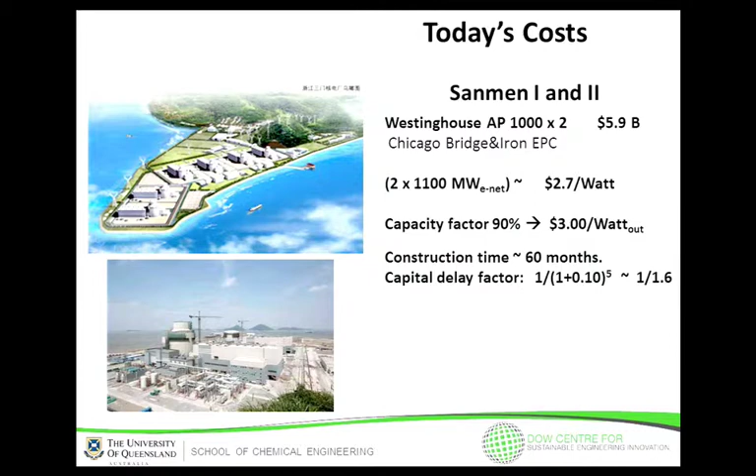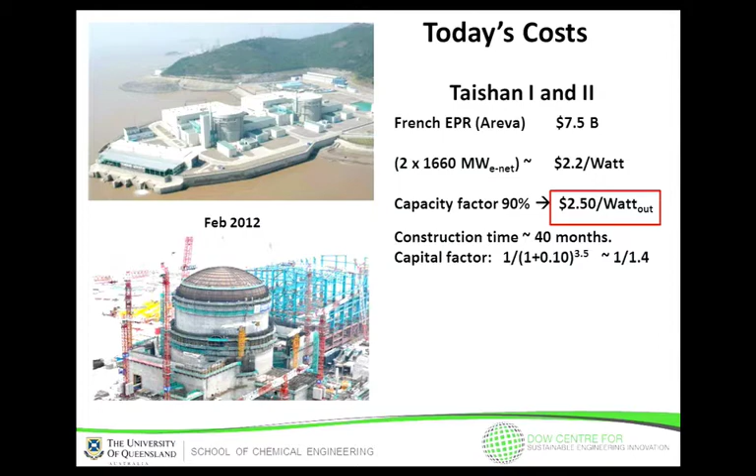Sanmen in China, built by Chicago Bridge and Iron, came in at about $5.9 billion, including financing costs. That's about $3 a watt output in cost. It took about 60 months to build. So that's not so bad. Taishan isn't finished yet. It's probably going to come in maybe a little bit cheaper with the Areva EPR design. Areva didn't make any money on this job, but nonetheless, it still looks not so bad. Probably is going to take about 40 months to complete, but probably coming in at a pretty reasonable cost.

In the US, however, Vogtle 3 and 4 is already looking like it's going to be close to $8 a watt. And that's early. It's not done. And so it's only going to go up from there. It's not going to come down.

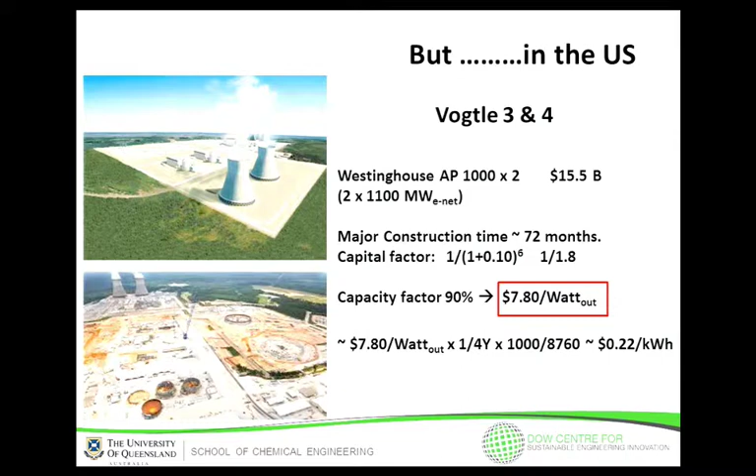So these kinds of costs are really pretty prohibitive in terms of producing power. And essentially all projects, including the ones in China, always escalate. I mean, you never see a case where they're being built under budget. And so all of these costs are quite high. And when you're looking at a financial risk of putting billions of dollars at stake, and you have these kinds of risk factors, people end up not making decisions.

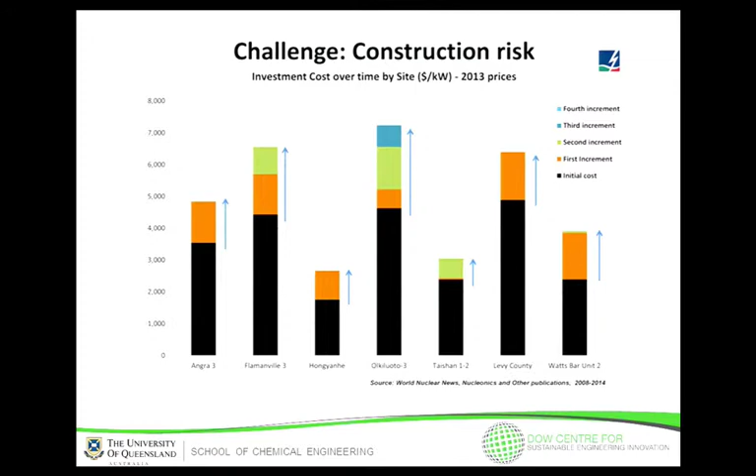And I think that's going to be true here in the UK, where they claim they're going to be doing some new build, but when the people have to write checks with these kinds of risks, unless they're backstopped by the government, they're not going to be making these kinds of decisions. Not that people don't spend billions of dollars. People spend billions of dollars all the time on big projects, but they don't want to not make any money when they do that.

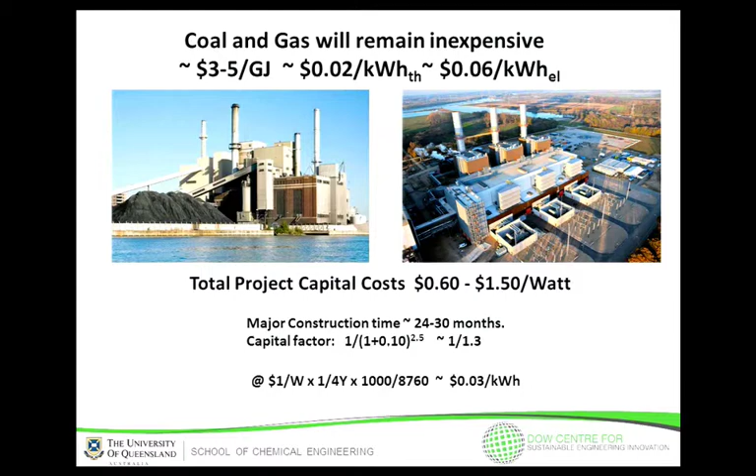The setting, though, in terms of the competition, is that coal and gas are going to remain inexpensive. They're going to remain inexpensive for our lifetimes and probably our kids' lifetimes. And if you look at just the OPEX cost for fuel, it's going to be around 6 cents a kilowatt hour globally. Some places higher, some places lower. And almost everywhere with the most advanced technology with fossil fuels, they're coming in at about $1 a watt. So that's not a lot of money to be spending for producing power, and because power has to be cheap, that's what it needs to cost.

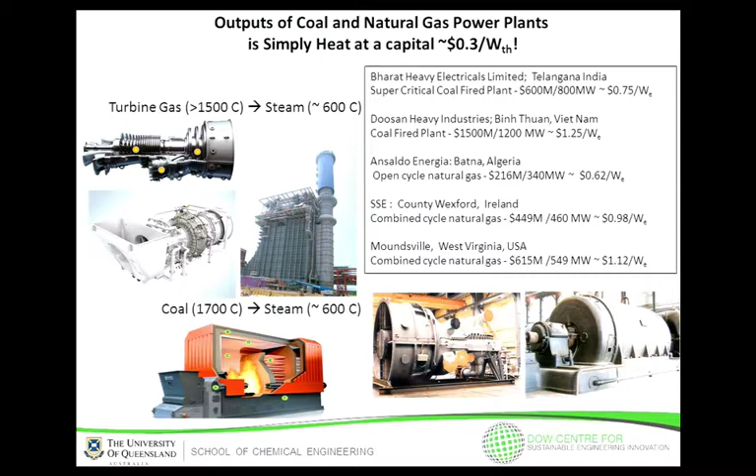And the cost of $1 a watt is using advanced stuff. You're using supercritical steam, combined cycle, all the state-of-the-art types of power technologies, and it's still coming in at very, very low capital costs. On dollars per watt of thermal, it's only about 30 cents a watt thermal production.

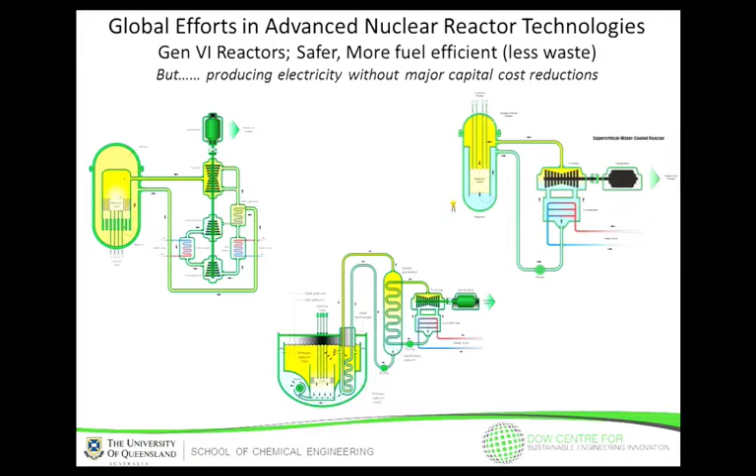If you look at what people are doing in the nuclear space, if you look at all the Gen 4 designs, they're all terrific in terms of addressing concerns on safety, better use of fuel, all kinds of new bells and whistles that make them nice engineering designs, but unfortunately none of them are going to be cheaper than the old designs. They're all going to be, in fact, more expensive.

There's been talk about co-producing things like desalinated water, and there was a project in Kazakhstan to take a 1,000 megawatt reactor and derate it a little bit and do desal. With power at 1,000 megawatts, 333 megawatts electric, that's about $83 million a year in revenue. Or in the case of this plant where they derated it, they made 120,000 meters cubed per day of desalinated water, but water is produced everywhere in the world for $1 a meter cubed. So desal only, in fact, reduces your total revenue.

So you might as well just sell the power. Desalinated water isn't valuable, and we know how to make it. It's off-the-shelf equipment at $1 a meter cubed, and so you don't really gain anything by making desalinated water.

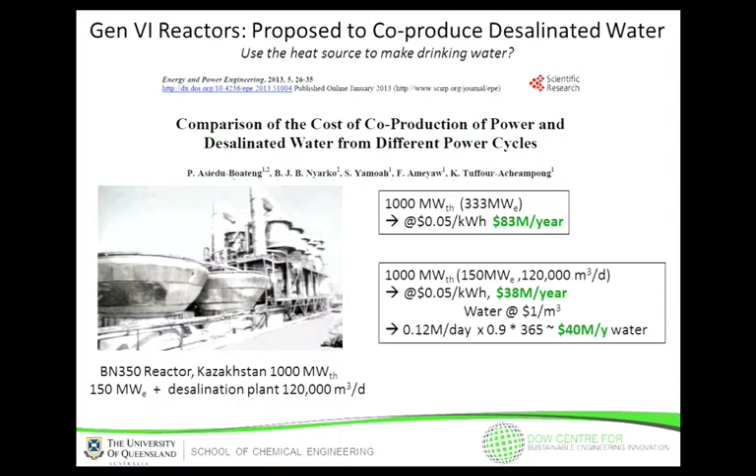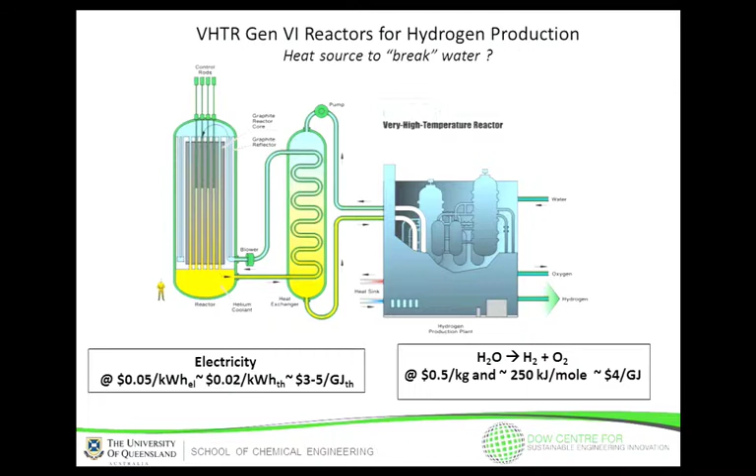There's been a big thrust to make hydrogen. Well, hydrogen is equally as low cost as electricity, so if you derate a reactor or even use some of just the thermal waste heat, you're making something that isn't worth very much, about the same as the electricity. So hydrogen isn't necessarily a good product to be making with nuclear reactors. It's not going to change the attractiveness of the investment in terms of the investment community.

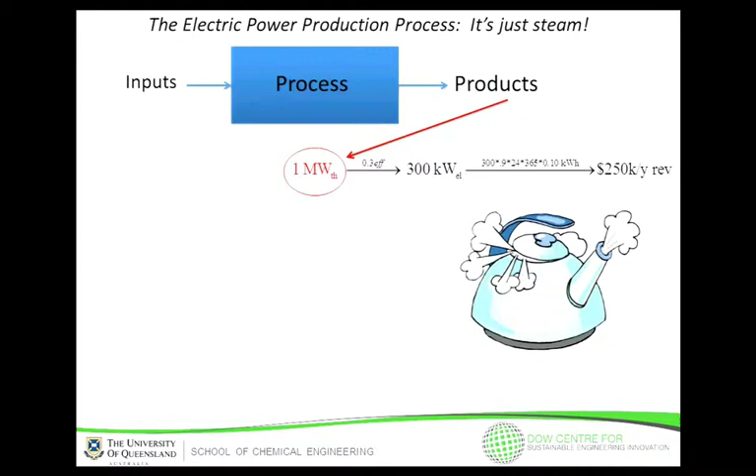At the end of the day, you're making steam. And so if you have a megawatt of thermal energy, 30% efficiency to make the electricity, the most you're going to make in revenue, assuming you can get 10 cents a kilowatt hour, which is generous, is $250,000 a year per megawatt, and it's probably going to be about half that because no one's going to pay you 10 cents a kilowatt hour for electricity. So you don't have a lot of revenue that you're going to be making when you make steam.

And whether you make it from burning lots of coal or natural gas, or if you make it from uranium, you're still making the same product. So the piece of capital that you're making to make that revenue can't cost more than about $1 a watt. That's just the basic economics, and you can't change that. So if one's looking at making an investment to produce power, even if you look at carbon taxes of $30 or $40 a ton, it's still not going to work economically very well.

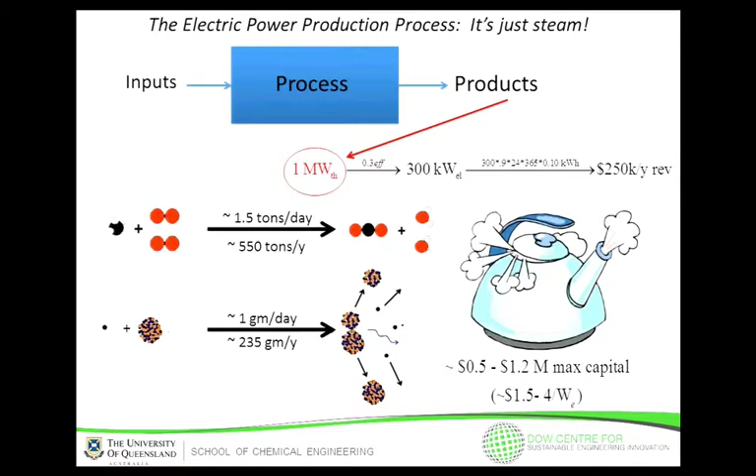So you can look at what happened in biofuels in the US as kind of a case study and learn something from what they did. Everyone was going to take biomass and make it into fuels, and the argument was it's a big giant market. We can make this, and it's going to be green, and people are going to pay a premium. It's a relatively complex process, though, to take things that don't look at all like fuels and make them into fuels. There's lots of other issues with gathering sufficient feedstock, and there's other competing processes.

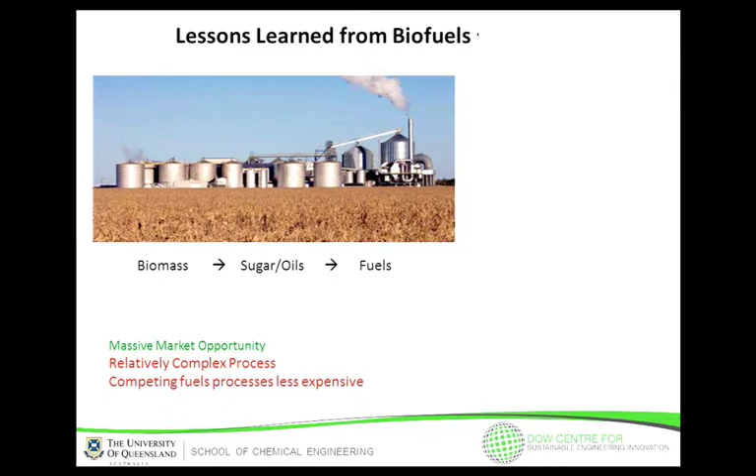So what the biofuels industry in the US that had all the promise has done is they decided they could actually make money by making chemicals. And in fact, that's what they've all done. All these companies, the ones that have survived anyway, have changed their business model so that they can make something with basically the same amount of capital that has more revenue. And the ones that are surviving are doing that. They're making chemicals, and particularly the chemicals that have some unique feature that makes them look like the feedstock. Because in chemical transformation, you don't like to do lots and lots of steps. You want to do a few steps and make something that looks pretty much like the feedstock.

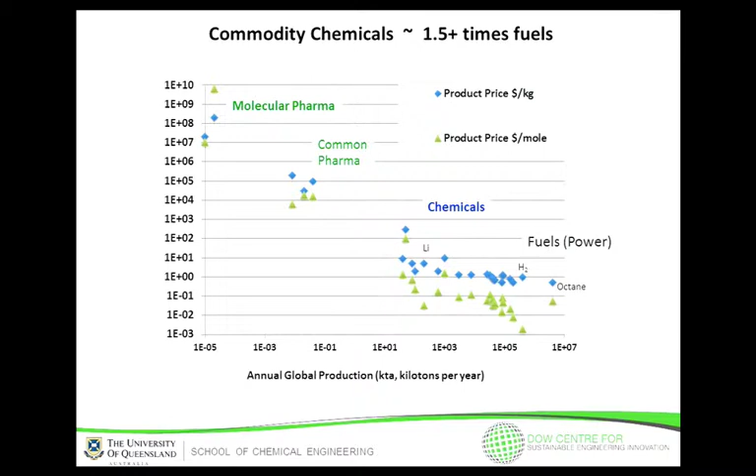When you look at the things that you might make in the chemical space, molecular pharmaceuticals are the highest value, at many millions of dollars per kilogram many times. And then the intermediate chemicals are a lot lower value. The blue dots are price per kilogram, and the green are dollars per mole. And fuel is basically the cheapest thing you can make. There's some commodity chemicals that are pretty close, but at least you get maybe a factor of 2 in value improvement if you make chemicals rather than fuels. And by the way, the volumes are pretty big for a lot of these commodity chemicals, so you have a big advantage that they're large volume.

So what happened with the biofuels industry is they took unique features of biomass and they tried to match that to unique chemicals to give them the most value. But in nuclear reactions, what we end up doing is we take fission and we make heat at electron volt type energies. And so you've taken all of the good stuff out of nuclear reactions and basically thermalized it to make it no more valuable than doing chemical reactions. But if you look at what's unique about nuclear reactions, you have fission fragments at 100,000,000 electron volts, you have ionizing radiation at 1,000,000 electron volts. That's unique. That's something special that you can't do in other ways.

So when you look at what you might make with nuclear reactions, the highest value things are isotopes. Isotopes are going to give you the highest value, though the market's relatively small, and maybe neutrons, if you want to activate silicon and make phosphorus for doped silicon. These kinds of things are unique to nuclear reactions. You aren't going to get neutrons from somewhere else. In the middle, there's cost-advantaged products of nuclear reactions like ionizing radiation. You can make ionizing radiation with other means, like electron beams, but it's still potentially cost-advantaged to do it with a nuclear reaction. The worst thing you can do is make heat, because there's lots of competition, and it's not the best way you can make it.

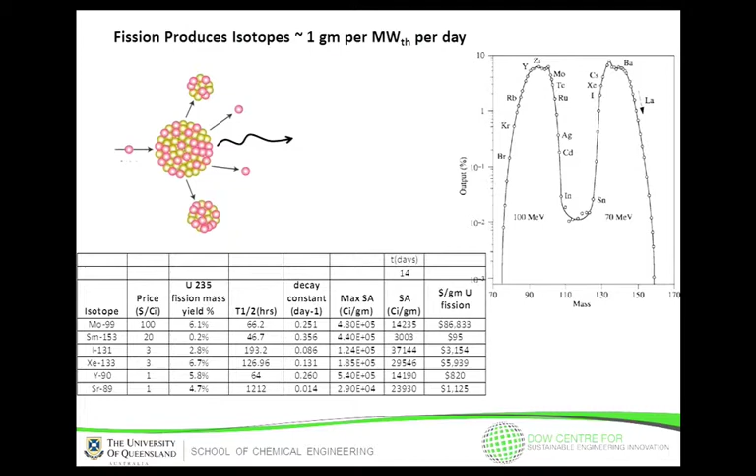So with isotope production, you're fortunate: you get a gram per day per megawatt, and a lot of these isotopes are very valuable, hundreds of thousands of dollars a gram. So you have lots of options to sell isotopes, and many of these are valued by the medical industry and in the industrial pharmaceutical or chemical area. They use them for tracers in the petrochemical areas. So these can have significant value, and they are the highest value thing you could possibly make with nuclear reactors. So isotopes are a big target, and there's companies that do this.

Nordion makes about $300 million a year making xenon and iodine. Moly 99 is primarily the biggest market. And there's a big need coming up as research reactors that make moly are being shut down. So there's a big need for making this very valuable isotope. And if you have this reactor now and you have an option to make a megawatt of thermal energy, or make a gram of fission fragments per megawatt per day and possibly make millions of dollars rather than only $250,000 a year per megawatt, you're going to choose to make isotopes, because that's a better value proposition for basically the same capital investment. So who wouldn't want to do it?

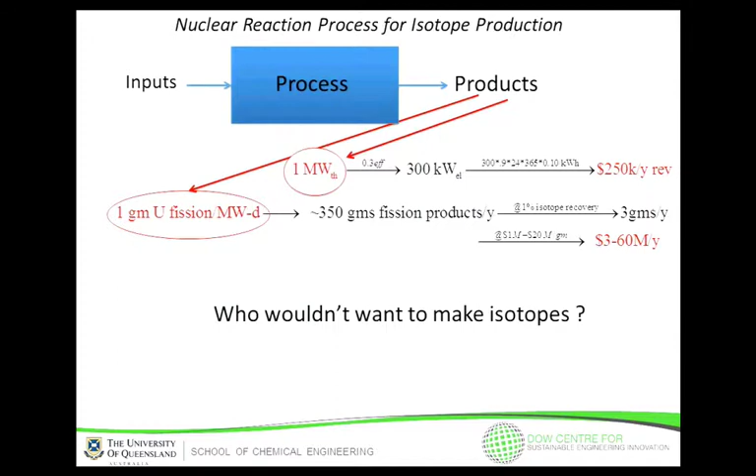But the problem is that lots of other ways are emerging, because it's too much of a hassle to use a nuclear reactor. So people are using non-reactor sources to make isotopes. The other thing about isotopes is it won't finance new reactor development. You'd fill the market with one large reactor. So no one's going to finance new reactor development with the idea that isotopes are going to carry it, because it won't.

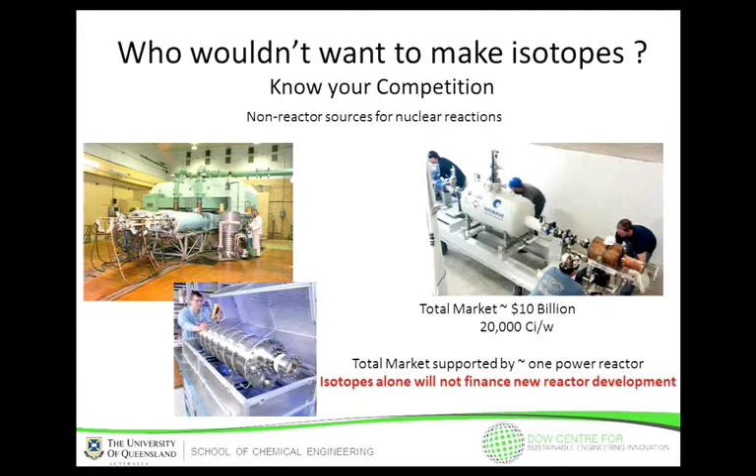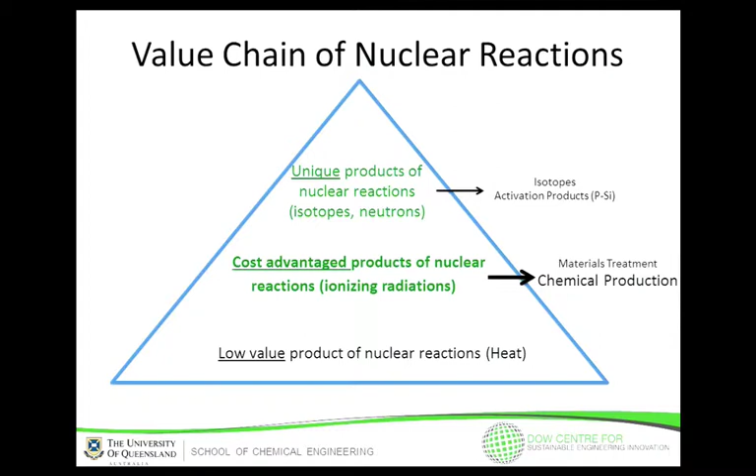Looking at the cost advantage products that you might be able to make use of, and these are the ionizing radiations, the idea that we're looking at is: are there chemicals that are uniquely suited to radiation chemistry that might have enough value and have your reactor or your nuclear reaction source or your nuclear isotopes as being the preferred source? And this has been around for a long time.

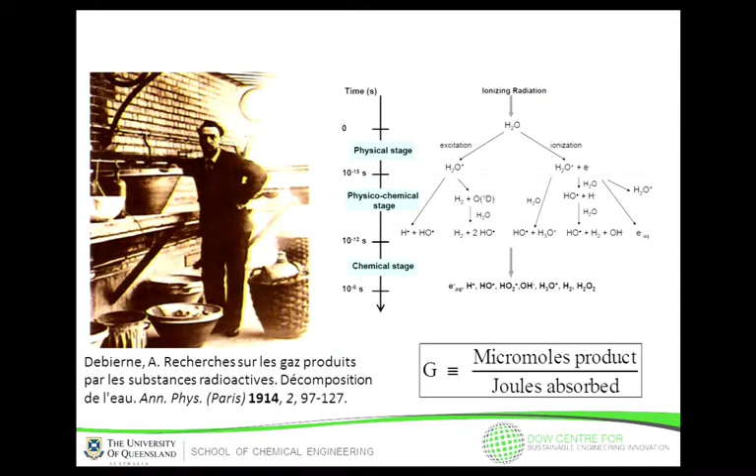Radiolysis of water was observed in 1914. And we know that there's a lot of things one can make through radiolysis. The critical factor, which I'll come back to, is G, the micromoles of product per joule absorbed. And so different chemistries have different yields of products per joule absorbed. It depends a little bit on the radiation, but we'll just use that as a measure for a minute.

Now, there's an enormous history in radiation chemistry. You all have done a lot here. I know you have faculty members that are very active and leaders in this space. Generally, though, a lot of the work was done with the idea that you're going to look at processes that are related to the operation of the reactor. What's happening in the coolant, what's happening in the materials, how are we going to make use of this in terms of making the power reactor run better.

There's been some work, and back in the 60s or so, all the oil companies thought that nuclear power was going to take off and they were going to have lots of radiation sources. So the oil companies, in fact, looked at things like what they call cold cracking, using radiation to do petrochemical processing. There was some work, but not a lot. Certainly not a lot of fundamental work, not a lot of optimization work. But lots of things have been irradiated, and you can make lots of products.

Probably not necessary for this group, but typically I'll explain it to people that if you have 100 kilowatts of heat and you put it into a reactor that has water flowing through it, you make hot water, and don't make any hydrogen or oxygen. But if you irradiate that same reactor with 100 kilowatts of gamma radiation at 1 MeV, you'll make hot water, less hot than the case of heat, but you'll make some hydrogen and oxygen. And so this idea that you're going to be able to do non-equilibrium chemistry potentially has some value.

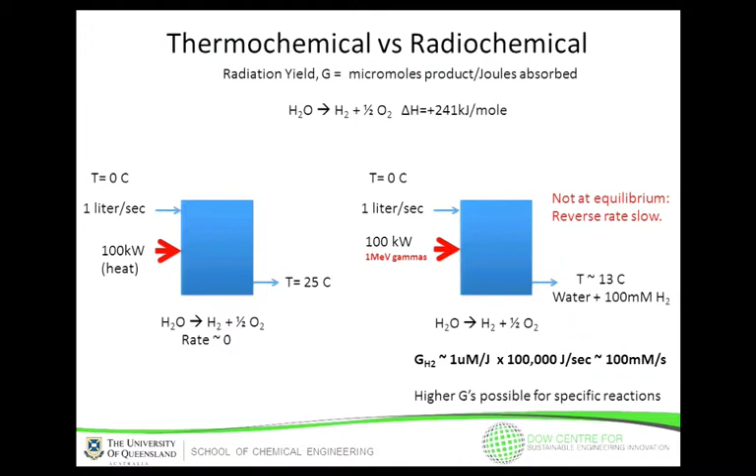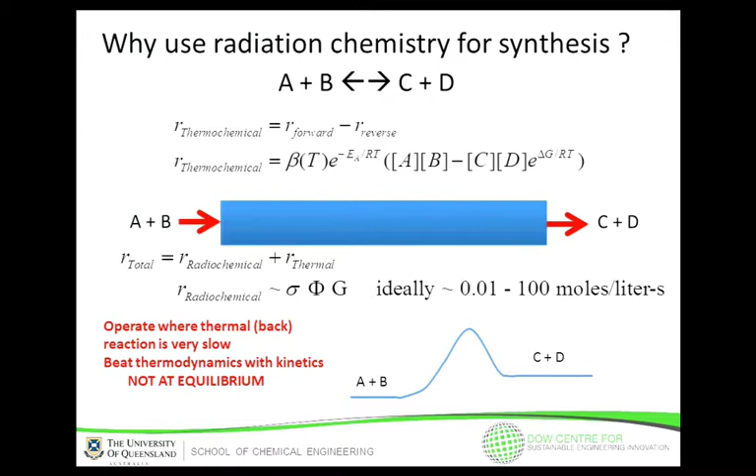And the idea is to take advantage of kinetic direction of reactions where you don't have to worry about a back reaction, because you're running the reaction at temperatures where the back reaction may be disfavored, like in the case of making hydrogen and oxygen. You do that in a room temperature glass of water. Hydrogen and oxygen won't recombine at room temperature, even though thermodynamically they'd like to. So you don't have a pathway to recombine. And so this can allow you to play some games and give you another knob in chemical processing.

One way to do it is to adopt some of the things that people have used for solar conversion or making chemicals using photoelectrochemistry, where either you can use a scintillator and convert your gamma rays into visible light and do redox chemistry to make hydrogen and oxygen. I wouldn't choose that, but you could make it. Or you can have wider gap materials and you can make chlorine and halogens and other things, so that you could just use redox chemistry.

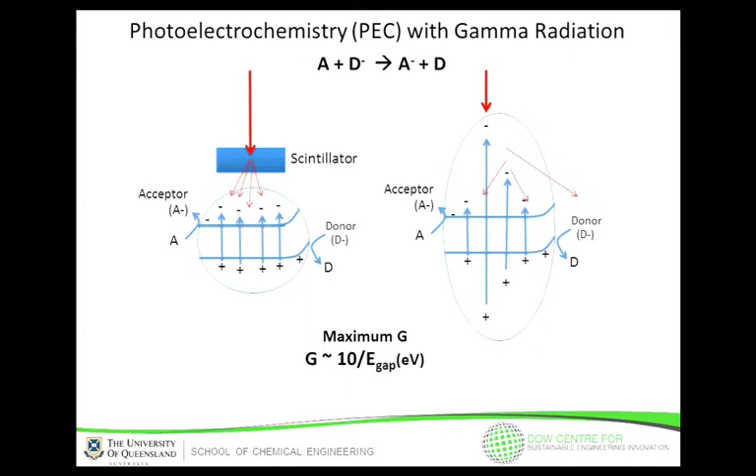The problem with this is the G's are typically limited to about 10 divided by the band gap in energy, in electron volts. So you're limited to G's of about 10 at most. You won't get a lot of product for your radiation source. Now, when you enable chain reactions, though, you can get G's that are extremely high. So with the chain reactions, especially if you use that as an initiation process, you can get G factors of 100 to 1,000,000. And these have been demonstrated in certain systems.

And the way to think about it from a chemical productivity point of view is that roughly 3 times the G factor is the number of kilotons per year you can make per megawatt of gamma. Now, typically a commercial chemical process makes about 10 to 100 kilotons per year. A big one makes 1,000 kilotons per year, a few of those. But you're looking for things that would give you at least about 10 kilotons per year of a mid-range chemical to make it interesting.

And so you're going to be able to get reasonable amounts of yield from G factors that are quite achievable from a lot of chemistry that I'll talk about in a minute.

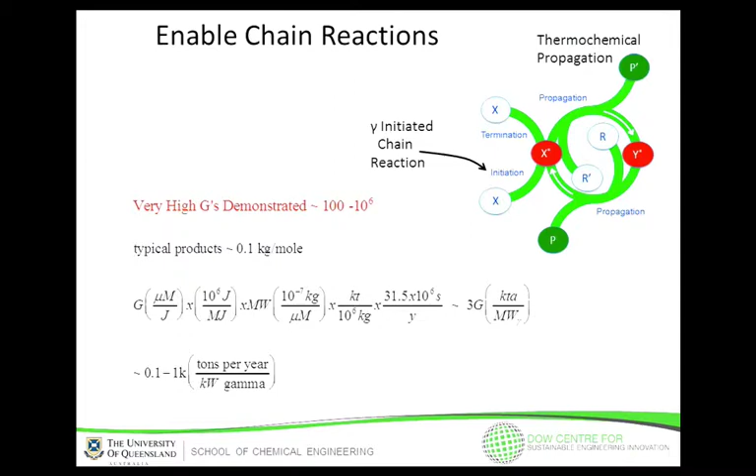So Dow Chemical was one of the first companies, in fact, to use gamma radiation to make a commodity chemical. At the time, ethyl bromide was used as a gasoline additive when people used lead in their gasoline. And so they reacted hydrogen bromide with ethylene, and they had G factors of about 10 to the 3, 10 to the 4. They produced commercial quantities, and it used a cobalt-60 source as the gamma radiation source.

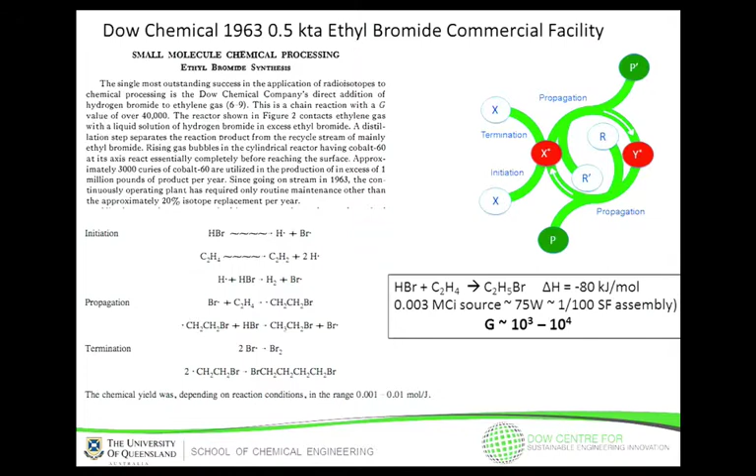And by the way, that source size to make a commercial plant was about 1/100th of the radiation you would get from a typical spent fuel assembly from a power reactor. So it wasn't a lot of activity.

There's lots and lots of chemistry examples that people have used in industry in areas of photochemistry on commercial scale, where they've made things using particularly UV lights, a common source. Photochlorination is done, sulfochlorination is done, nitrosation is done. These things are produced commercially using usually UV light, but everything you can do with UV light, you can do with gamma rays. And potentially, they're a cheaper source of photons. What you really care about is what the dollars are per ionizing radiation unit.

And for example, Toray used to make cyclohexanone oxime for making nylon. They had a very large commercial facility in Japan, and the only reason they shut it down was because the electricity costs for running their UV lights got to be so prohibitive, because the electricity prices in Japan are now very high.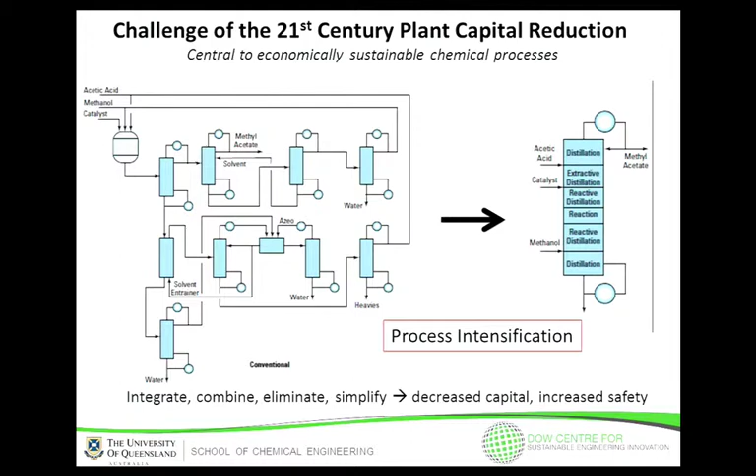And making methyl acetate is a good example. What took a fairly large plant with lots of different unit operations can be done in one reactive distillation column today. And so you combine steps, you make the capital costs come down, and so you can change the normal scaling relationships, which make people spend a lot of money on capital projects because you needed the scale to make it work, and you can actually build things at smaller scale that still make a lot of money if you're clever.

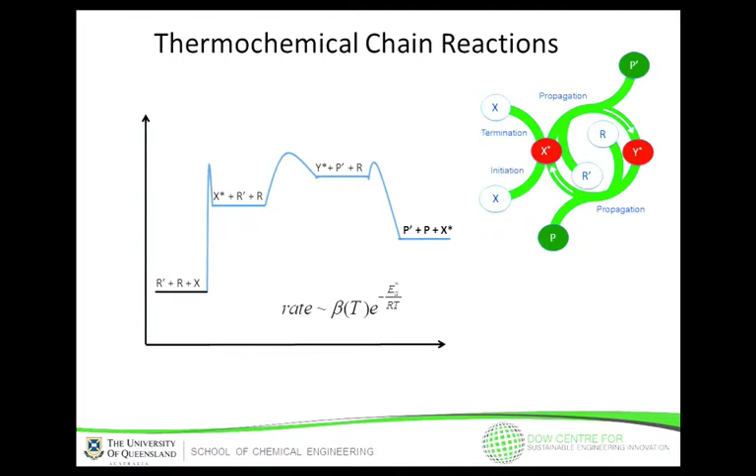So when you look at thermochemistry on chain reactions, for example, the rates are going to be proportional to temperature, and if you have an initiation step that's fairly high, you're going to need a temperature that's high enough to have your initiation rate high enough to drive the overall reaction at an acceptable commercial rate. If you add in a radiation source, you change the kinetics a little bit, and you can speed up that initiation step, and then the other steps thermochemically may proceed quite well and quite quickly at much lower temperatures. So you have the opportunity to lower the temperature that you run reactions.

And the thing that's nice about that is that means you can run it in, say, a distillation column, something that would have taken a lot of energy and a lot of heat to run under normal conditions. If you can speed it up a little bit using radiation, then you can in fact have significant process improvements. So in the case of the ethyl bromide, it was a slightly exothermic reaction. You still have to remove a little bit of heat, and thermochemically, though, it operates very, very efficiently at low temperature. And in fact, the Dow process was really a reactive distillation. They ran it at very low temperatures where they could separate the ethyl bromide very easily, and they irradiated it, and they got enough rate because they were using radiation to initiate it.

You can also run uphill reactions if you put a little bit of heat in. As long as the thermochemical steps that are in between the initiation and the final product are sufficiently thermochemically advantageous, and especially if you pull off a product in a reactive distillation, you can drive reactions uphill as well at quite acceptable rates at much lower temperatures than if you had to initiate them with thermochemistry.

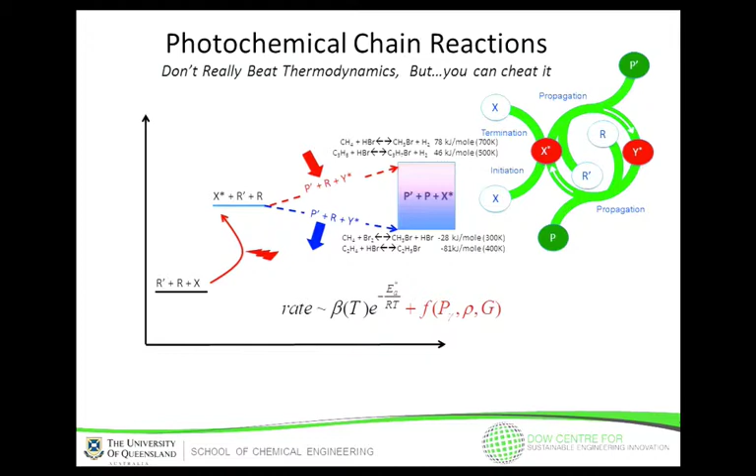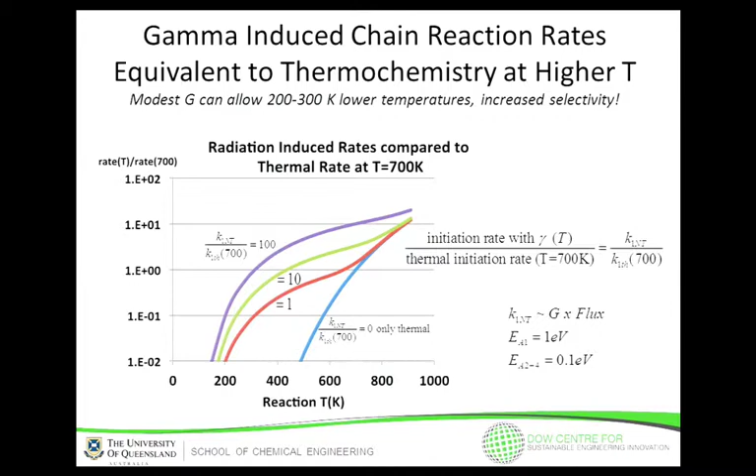So just as an example, in a halogenation reactor, if you show the comparison to a thermochemical reaction where the initial initiation step is all thermochemical, you can increase the rate by increasing the temperature. But if you give a radiation kick to it, say a factor of 10 over what you would have had from the thermochemistry, you can lower the temperature for the same reaction rate by about 200 degrees Kelvin. And that gives you significant process help, not only for rates, but also for byproducts. You limit the number of byproducts that you'll be making. So you have a better process, a cheaper process that can really be operated at less expense.

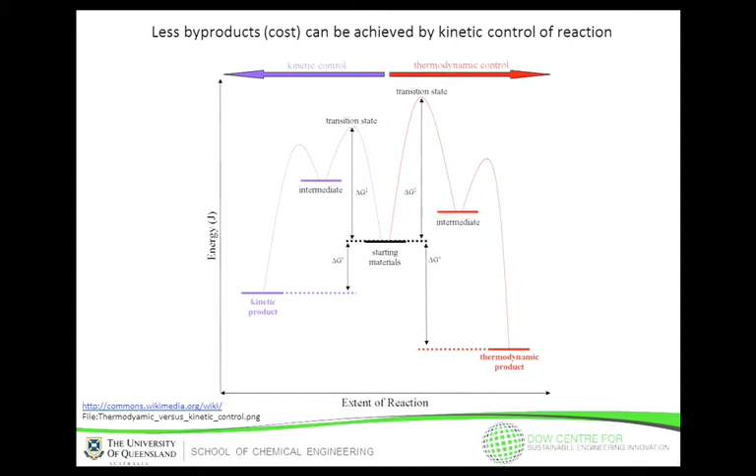And so this idea of using kinetic control to minimize byproducts is widely done. You oftentimes will run a chemical process at a temperature that doesn't necessarily give you the best rate, but it gives you the lowest byproducts. And that's because you're favoring reactions that are kinetically driven, and you're not pushing it to thermodynamic equilibrium, which gives you byproducts you didn't really want. So this is done all the time, but normally when you do it with thermochemistry, you pay a price in rate.

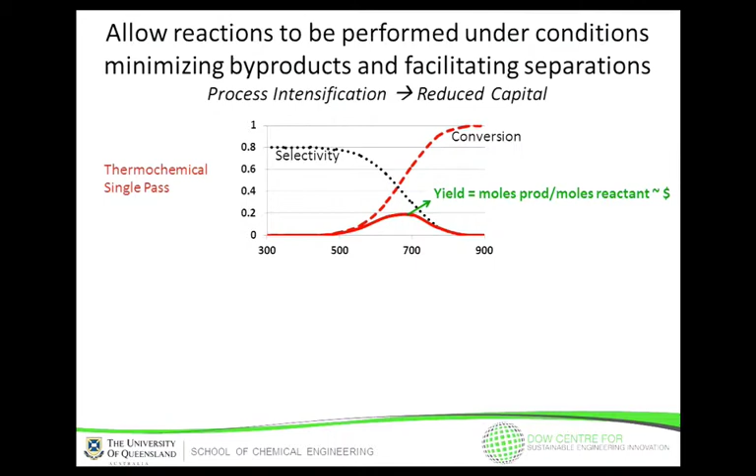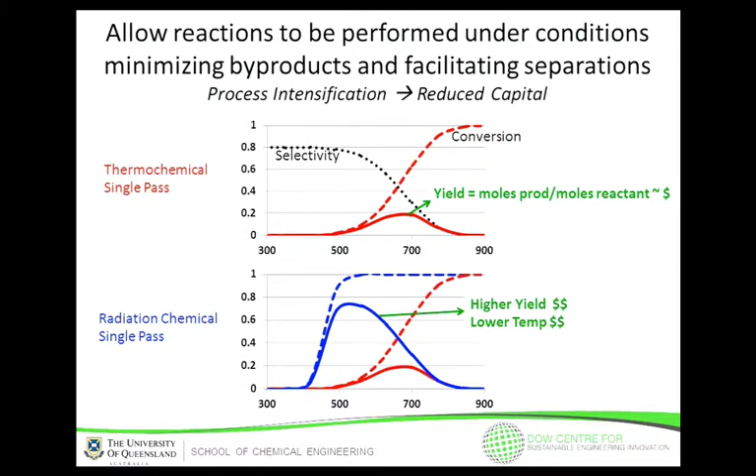So when you look at single-pass conversions from regular thermochemical reactions, you look at the yield, which is the product of the selectivity and the conversion, and the yield's going to be what translates generally into the productivity or profitability of the process. Single-pass conversions are typically about 20% or so for a commercial reactor, but if you add radiation, you can shift to higher yields at lower temperatures than you could have done thermochemically. And this is what gives you a potential advantage for certain reactions using radiation chemistry.

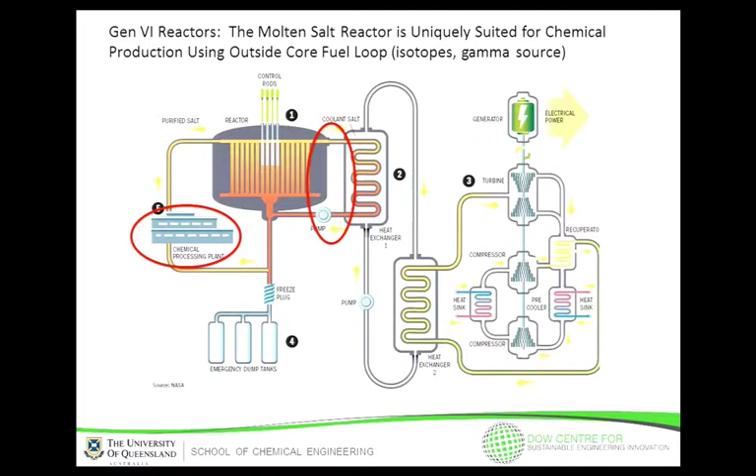So in the Gen 4 designs, the one design that we happen to like for potentially making use of this is the molten salt reactors, because you're carrying the activity around all the way through the primary heat exchanger, and so you have lots of access to very high activity loops that you can put in proximity to chemical systems. Also, when they do the online processing, you're going to be pulling out the xenon and krypton in real time, and the xenon and krypton alone gives you enough gamma ray energy to run a pretty decent sized chemical process.

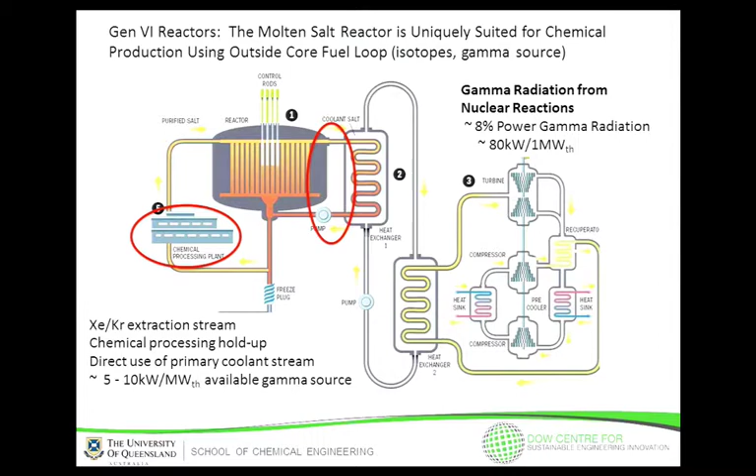So roughly 8% of the reactor power in a power reactor is gamma radiation. You can probably get 1% or so of that with reasonable design. And you'll be looking at probably 5 to 10 kilowatts of gamma radiation per megawatt thermal of a reactor. So you have lots of opportunity to get access to this radiation.

Now with molten salt technologies, there's lots of challenges. In some ways it's a nice system because chemical engineers like to pull things out of molten salts, because we have ways of extracting and using electrochemistry to pull out the fission fragments. The problem, of course, is the corrosion and some other things. But we run processes today in the chemical industry in molten salt environments. The coolant in phthalic anhydride is a molten salt, high temperature, hugely exothermic reactor. In fact, more power generation per meter cubed of reactor than a typical nuclear reactor. And we run this all the time with molten salt. So we know how to do this.

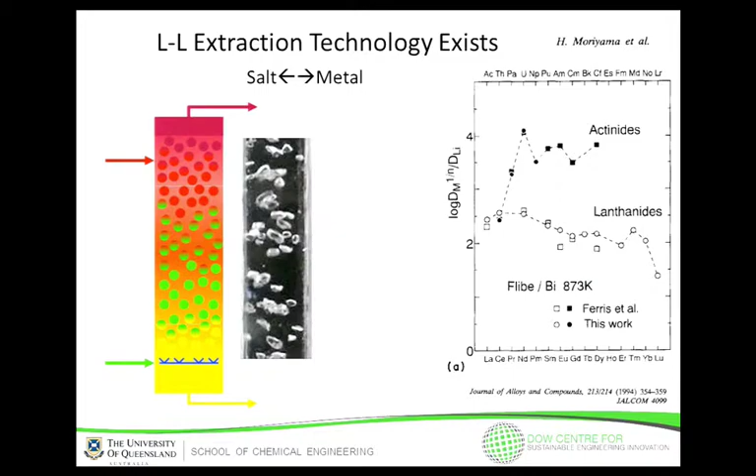The liquid-liquid extractions are also done all the time, so these kinds of things are quite familiar to the chemical industry. So getting these things to do online reprocessing is not a reach in technology, and people have been doing it in the nuclear space for some time. I won't talk too much about this.

So our approach to the problem is really to start small scale, because I think the idea of using reactors right off the bat is probably not realistic. But there are technologies out there today. Gamma radiation is used all over the world for sterilization. In fact, in Australia, 20 minutes from our campus, there's a commercial irradiator that we visited that irradiates the imported items that the customs people don't seem to like.

When my wife and I were moving to Australia, they unpacked everything we brought, and they identified in our entire household 4 pine cones that they insisted we either pay $150 to dispose of, or they would gamma irradiate them for $1,600. And this was operated by high school graduates; this wasn't a sophisticated operation.

And subsequently, we've got the costing of it. It was built by a Canadian company, and we know how much it costs. We know how much it costs to operate, and it's not very expensive. So you can get sources of gamma radiation to do studies to actually cost out a chemical process that you could do today.

And licensing it, if it can be licensed in Australia, it can be licensed anywhere. Moving to spent fuel, you have other opportunities to do that. And in fact, there's even a scenario where you can imagine turning a spent fuel pond, rather than a money-losing operation, into a money-making operation. Someday, probably not in my lifetime, you might imagine using the reactor itself as a source. But first of all, you have to show that you can do it with other sources.

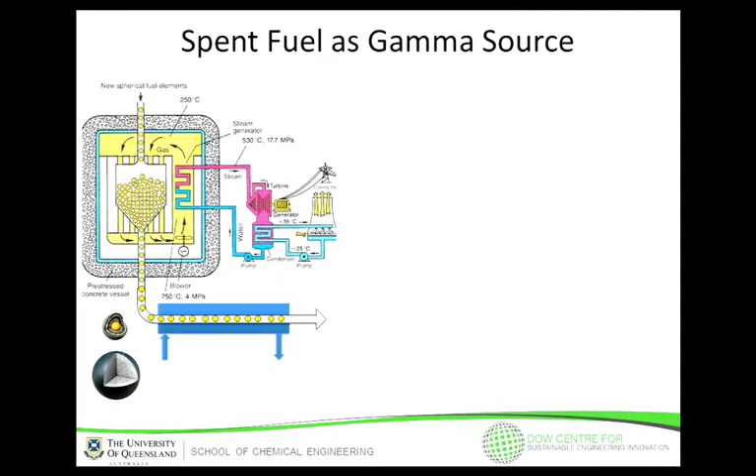Spent fuel bundles are ripe for utilization if one can imagine a plan. A typical power reactor fuel bundle, they get 60 assemblies per year per reactor. Each one's about 15 kilowatts, 1 to 4 years after shutdown, and those are about half gamma ray. So from a watts per meter squared, if you simply wanted to convert that into visible light photons and use solar cells, you've got 3,000 watts per meter squared, which is 3 times the maximum sunlight.

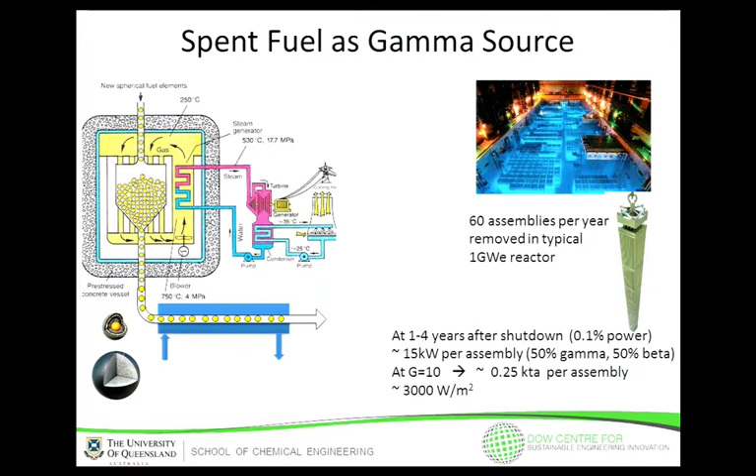So I'm not advocating doing it. I don't think it's a good idea, but people want to worry about capturing 1,000 watts per meter squared from the sun. They can get 3,000 watts per meter squared 24/7 from a spent fuel bundle. There's lots and lots of, you guys probably know this better than I do, there's lots and lots of activity in spent fuel, and in the US anyway, we have 12 billion curies that are receiving absolutely zero value, and it's only a negative value in watching it.

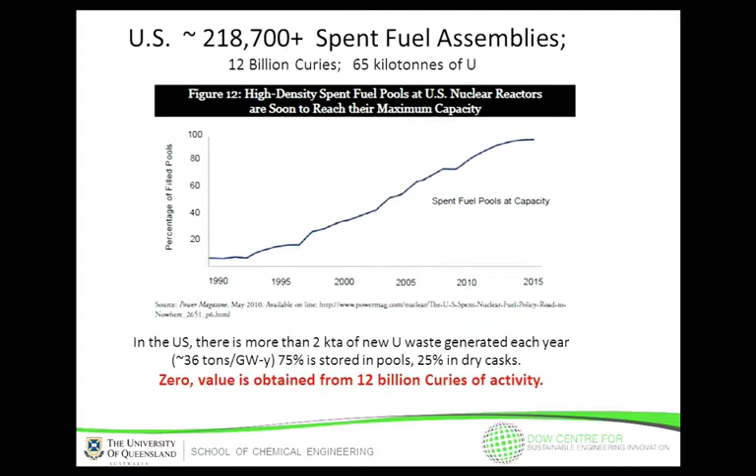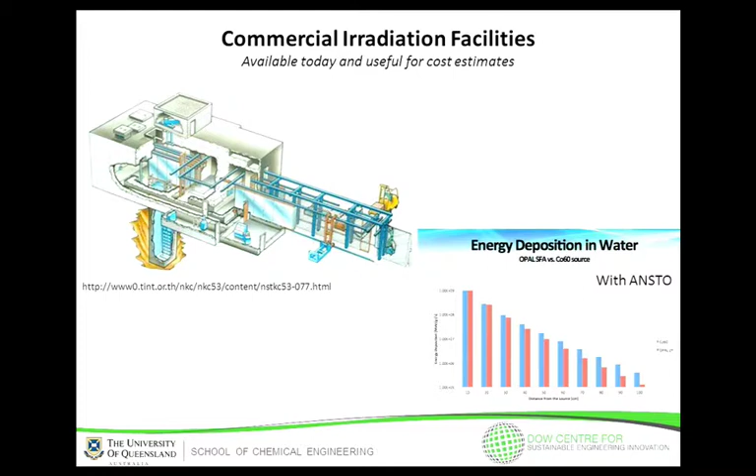So we've been doing a study right now using as a basis for costing what a commercial facility would cost for irradiating food. And we're working with ANSTO. They've shown that the energy deposition and penetrations and so forth of gamma of cobalt-60 sources are pretty similar to their spent fuel bundle. So they've measured their spent fuel at ANSTO, and we have a pretty good correspondence, so it's not a bad model for that.

One of the systems we're looking at is making a relatively small scale divinyl benzene process. Okay, divinyl benzene is $4 to $6 a kilogram. It's made today by dehydrogenating diethyl benzene. Takes high temperature, very low pressure for the reactor to drive it forward. Then you have to separate it. You got to go to high pressure, low temperature. So it's a pretty bad thermodynamically limited process. But they make it anyway because the product is so valuable.

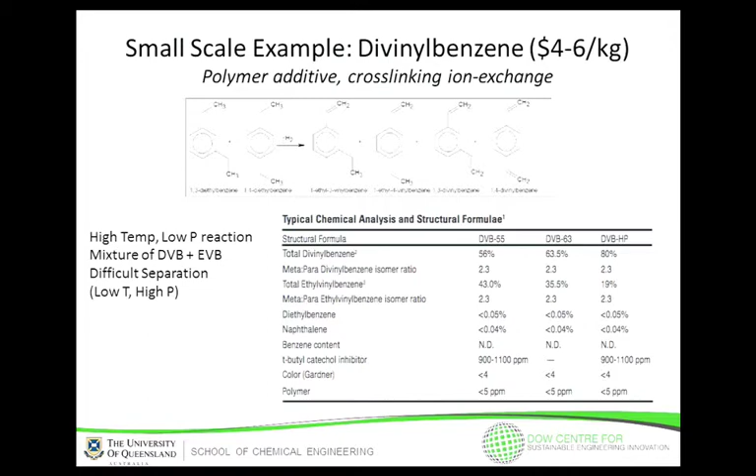The best stuff you can buy, which is from Dow, has only about 50% of the active divinyl benzene. The rest of it's the ethyl vinyl benzene, which is not as active, but that's what they live with because they can't make it any better. And it still goes for $4 to $6 a kilogram. So in a very simple system, which we've modeled in a better way than this figure gives justice to, with a G of only 500, you can readily make dibromoethylbenzene, as well as some monobromoethylbenzene, but they're very, very simple to separate.

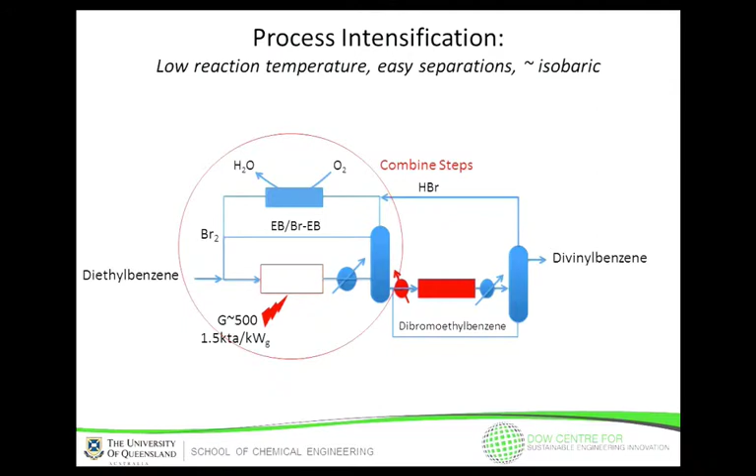One thing nice about halogens is that they're very heavy. So the separation, rather than separating an alkane from an olefin, you're separating a brominated alkane from an alkane, and that's a trivial separation. Easy to do at almost any pressure. So the separation is very easy, low energy consumption, and the dehydrobromination of the dibromoethylbenzene goes to 100% yield. So it's a very simple reaction. So all this stuff can be combined. It turns out into a reactive distillation by combining the oxygen reaction that makes hydrogen bromide back into bromine into an oxybromination in a single vessel.

And we've shown that we can do this. And here you irradiate basically the middle of a distillation column to make your dibromoethylbenzene. You separate it in the same column that you irradiated in, and then it goes through a really simple, cheap reactor that makes divinyl benzene. Anything that doesn't get reacted goes back to the distillation column.

And so if you look at this at 1.5 kilotons per kilowatt of gammas, assuming G is 500, which is what we've measured, you're looking at making $7.5 million per year per kilowatt of gamma radiation. So if you were to take, say, an SMR, make 50 megawatts of thermal energy, you're looking at $12 million a year revenue.

If you use only 1% of the gammas available from that SMR and you made divinyl benzene, you'd be making $150 million a year in revenue from divinyl benzene. And that would be a scale that would be pretty big if I tried to use all the gammas. If I used all the gammas, I'd be making 750 kilotons. That's too big. So I downrated it to only 75 kilotons, and I'm still making far more revenue than you could ever make with electricity.

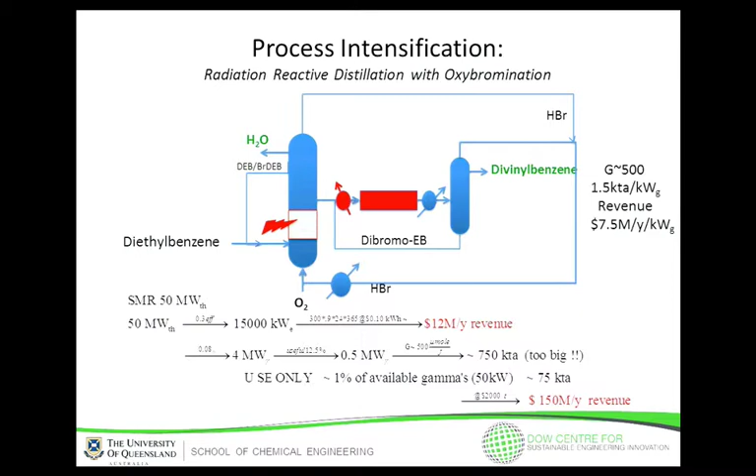The cool thing about this from a learning and student project and just science point of view is that this is a fairly unexplored area. You get to couple radiation transport with chemical reaction theory. There's lots of stuff that hasn't been done in very, very high dose rate chemistry, where they applied it in particular to try to make valuable chemicals.

So there's a lot of unknowns, a lot of things that we don't know, and we have modeling tools today that they didn't have back in the 1960s. So we can do a lot more theoretical work in this area. So it has lots of interesting basic problems that one could look at, when you change your point of view to, rather than saying what's going on in fuel corrosion, to say how can I make use of this radiation field to make something that makes money.

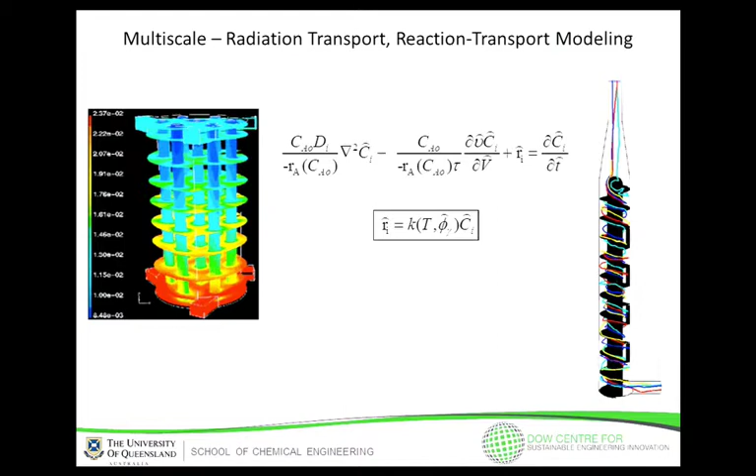Another example is sulfochlorides. In fact I have done this: if you go to any major scientist at Shell or BP or Exxon, they'll tell you the first problem on their list is methane. What do we do with methane? We have boatloads of methane. It's going to be here for many, many decades. How do we make use of it, especially when it's at relatively small scale?

Well, what we do today is we build a huge plant because that's the only way the scale works, and we reform it to make either methanol or hydrocarbons. But if you can do things on smaller scales, which would fit better with biomethane, for example, if you believe in that, or coal seam gas, there's smaller fields that you can have zero value methane for almost forever.

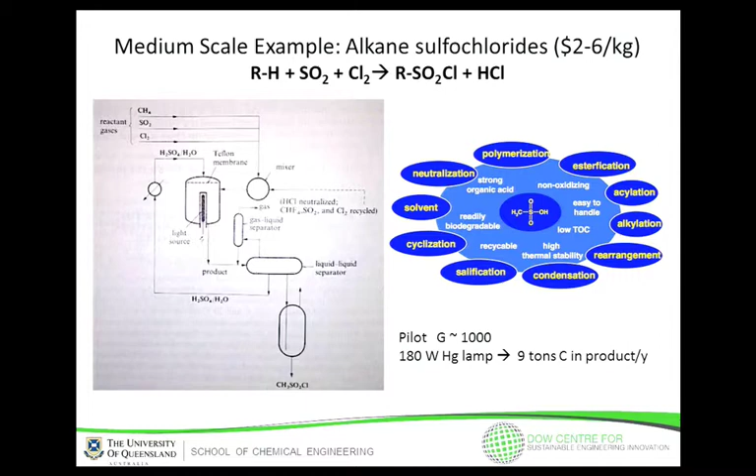Things like sulfochlorides become very interesting, and people have piloted a UV sulfochlorination-driven process and making 9 tons of carbon with just a simple 180-watt mercury lamp. Again, you can do all this, and sulfochlorination has been demonstrated with gamma rays at very, very high Gs. This pilot had a G of 1,000. So methane is a real big win.

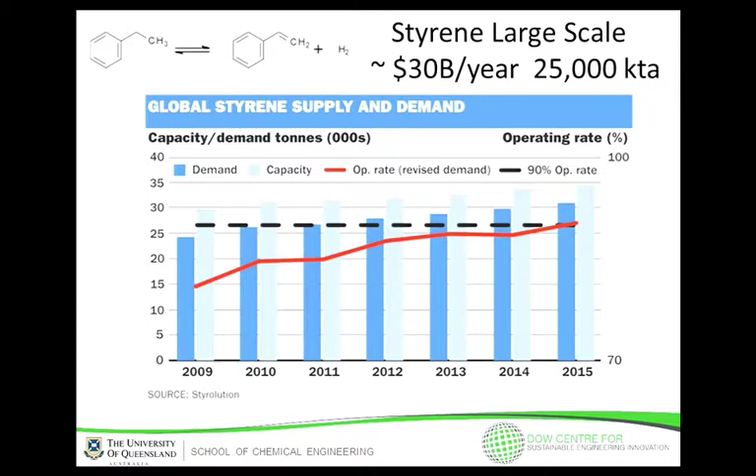The one we're looking at for large scale would be styrene. It's a $30 billion a year business, 25,000 kilotons per year and growing. So this scales basically with the world GDP, use of styrene. Basically, it's the same process as making divinyl benzene, but they do it on a bigger scale. You're doing dehydrogenation, so you're fighting equilibrium, high temperature, low pressure, and you have to separate it with low pressure, high temperature, or low pressure, low temperature, and that's a very costly process. Lots of recycle, and it's extremely expensive.

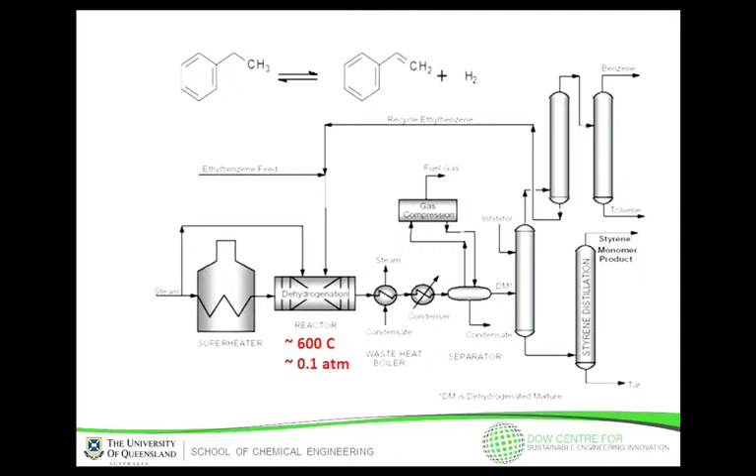Lots of byproducts because you have to do it at 600 degrees C. So it's true, you make byproducts when you irradiate things with gamma rays, but you also make byproducts when you heat something to 600 degrees C. So everything has byproducts, it's just the conditions here are not very favorable for doing reaction chemistry.

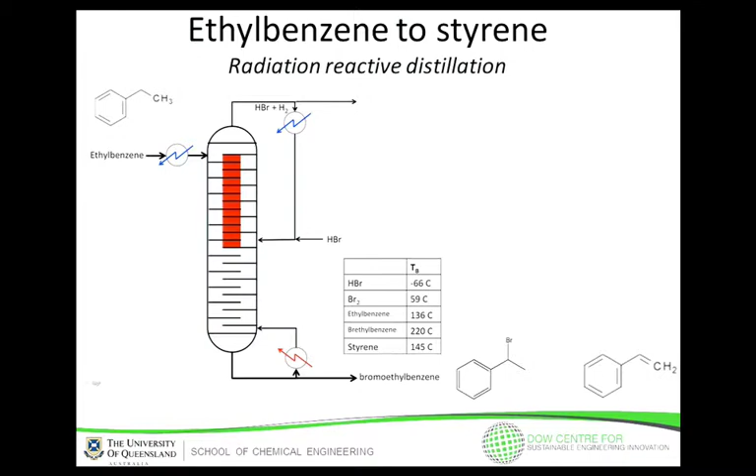So this is one we've modeled also with radiation reactive distillation using ethylbenzene. Nice thing about ethylbenzene is it has a single product, bromoethylbenzene, easy to separate, and then again, the dehydrobromination gives you the olefin. And we've done some experiments just confirming that we have very high yields, G of about 500 at room temperature.

So when you look at the things that you might make with your megawatt thermal energy, if you're going to be making electricity, you have a long way to go to get the capital to ever make any sense at all. If you want to make fission fragments into isotopes, you have a potential to make a lot of money, but you can only do that for a little while until the market's saturated. With commodity chemicals, though, you have a much bigger opportunity to make valuable things for a long period of time.

And so anytime that G is greater than 10, which isn't really that hard to do, your chemical revenue, if you look at typical chemical product values, is going to be bigger than your power revenue. The reason you don't want to make hydrogen is because it's sort of the worst thing you can make, and the best G you're going to get is probably going to be about G of 3 or 4.

So hydrogen is the lowest value thing you can make, so your chemical revenue is going to be about the same as your power revenue. But if you go with G values of 100, you're going to be making a lot more revenue from the chemicals than from the power. So with one large 3 gigawatt thermal power plant, you can at most make $750 million a year in power revenue. That's if you're lucky to get a good contract, government subsidized.

But if you only use 3 megawatts of the gammas from that, you can make a 1,000 kiloton world scale olefin plant. And people build these all the time, spending $10 or $20 billion a year. So they're something that people spend money on today, large value. And by the way, if you're going to build a $10 billion olefin plant, you have a 100 megawatt power plant on there anyway. So you need power anyway. And so the complexity of that plant, which is very complex anyway, is not going to be changed dramatically by integrating a reactor to that.

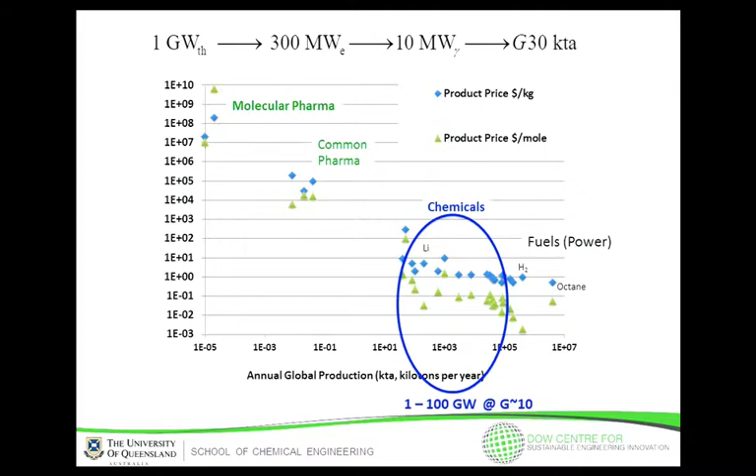So I'll summarize by saying that I still believe, at the end of the day, the reason I'm doing all this is because I think nuclear power is something that the world should have, and in particular democratic countries should be leading the way. The reason that they aren't doing it is because democratic countries are generally market-driven, and people will not invest in something that's going to be simply a money loser. It's not economical today. We have lots of competition from fossil fuels.

And rather than simply acquiescing to that and just saying they need to do the right thing and develop nuclear because it's great, which is what we as an industry have tended to do over the years, I think that accepting the world as it is, a competitive marketplace where we have to do things that are economical, and getting smart young people to come up with processes that would actually make somebody money is the most likely way to move forward. And co-producing chemicals is potentially a way to do that, using the unique radiations that you can get from a nuclear reaction.

So I think it's incredibly rich for innovation in an area where smart young people can do a lot better than certainly I've done and what has been done up to date. So I'll leave it at that and take any questions.

Thank you for a very interesting and stimulating talk. Is this open for questions?

Yeah. Do you see a potential stumbling block with regards to how radiation-induced chemistry can be very complicated and you might have potentially more byproducts that you need to separate? Is that a potential concern generally in this area? I mean, is this going to be something that will only be used for a handful of certain chemicals?